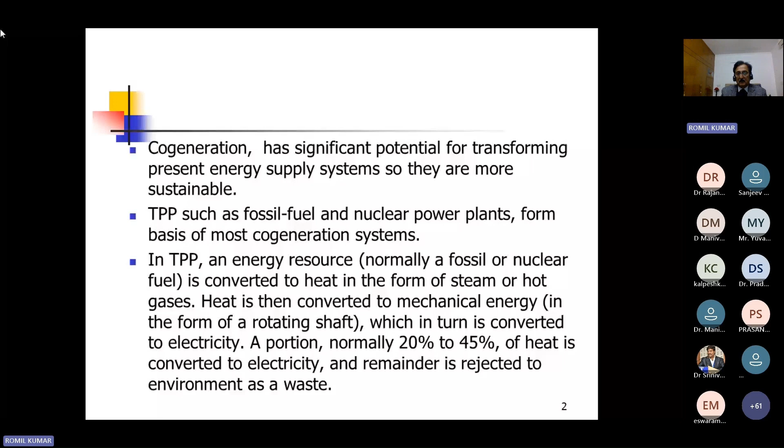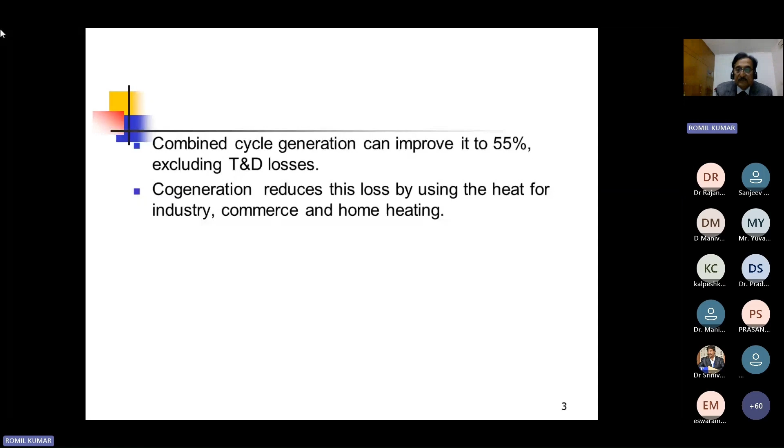Our intention is to harness this particular heat energy into some usable form, so that the efficiency of the overall plant is improved and less fuel is used to generate electricity, and at the same time heat energy, which we require for some definite purpose in the industry. By using combined cycle generation at thermal power plants, we could improve this particular efficiency from 45% to 55%, and the rest of the energy is wasted. But cogeneration reduces this loss further by utilizing the heat which was otherwise being wasted, for industry, commerce, and for heating of houses.

Basically, cogeneration of electricity, which is also called combined heat and power, is a process where both electricity and useful heat are produced from a single fuel source. This results in improved energy efficiency because we are utilizing the waste heat and reducing the wastage of energy into the environment. This ultimately leads to substantial cost savings on account of fuel, and reduced environmental impact because we are allowing less heat energy to go into the environment.

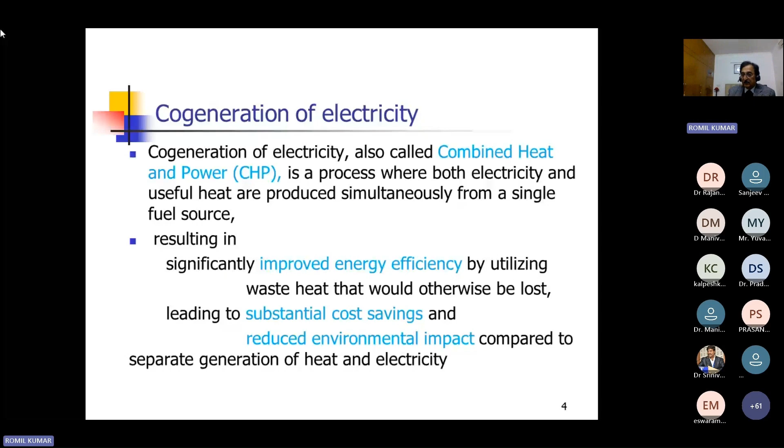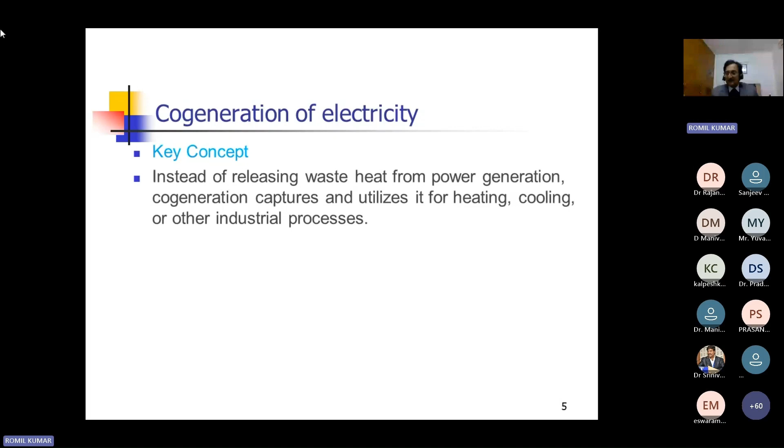The key concept for cogeneration of electricity is that instead of releasing the waste heat from power generation into the environment, we capture this heat energy and utilize it for heating, cooling, or any other industrial purposes which we can devise and provide beside the generation plant. So it is efficient power generation because the cogeneration system generates electricity while simultaneously capturing the waste heat, or utilizing the heat which otherwise was being wasted. This process significantly reduces energy waste and enhances the overall efficiency of the plant.

But for this, we have to devise methods for heat recovery and its utilization, because the captured heat is utilized for various applications. What can be the applications? Heating, cooling, or any other industrial processes which can run with the heat energy, or which can convert the heat energy into some useful energy, so that energy utilization is maximum and reliance on other heating systems is reduced.

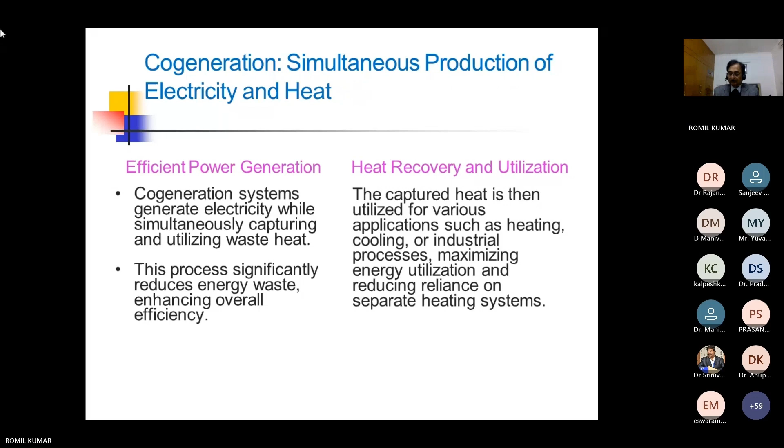Now, if we see the importance of electricity, electricity is the most important critical component of the infrastructure which affects the growth of any country. Because for the growth of any country, we need agriculture, and agriculture growth is there only when electricity is there. We need industries run with electricity, we need corporates, they run with electricity, because infrastructure is essential for sustained growth and that needs electricity.

We are generating electricity by two kinds of sources. One is coal, hydro, natural gas, oil and nuclear power. These sources or these fuels are called conventional sources.

Then there are some limitations, or we can say there are some environmental impacts of generation with the conventional sources, whether it may be coal, hydro, natural gas, oil or nuclear. So we have to shift our energy generation to non-conventional sources, which are wind, solar, agriculture and domestic waste, because the impact of generation from these non-conventional sources is less, pollution is less, and that's why we have got a shift to these non-conventional sources of energy.

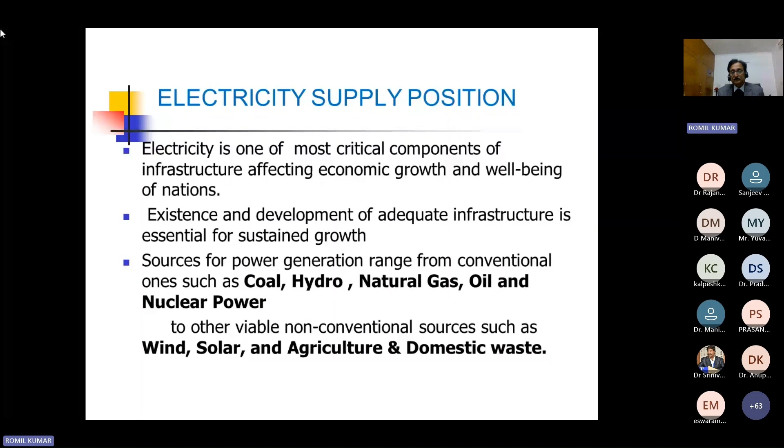Now, demand of electricity has been growing at a rapid rate, and it is increasing day by day. It is expected to grow further in the years to come. At present, India is the world's third largest producer of electricity and third largest consumer of electricity.

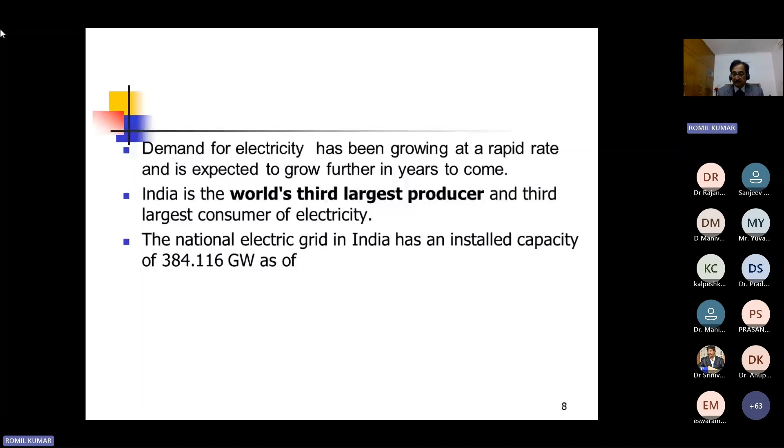The national electric grid in India has an installed capacity of 384.116 gigawatt as on 31st of December 2024, the latest figures available. And this is with the help of two types of sources categorized as renewable sources and non-renewable sources. Now, renewable sources are those which cannot be exhausted even after continuous utilization, such as sun, wind, and tidal energy. Non-renewable sources means those which are exhausted after their use, that cannot be reclaimed.

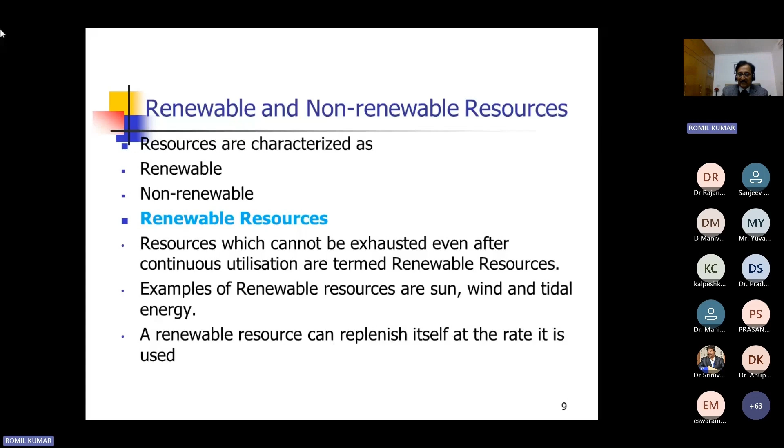Nuclear has got 8.180 gigawatt. Now, thermal and nuclear - in the production of electricity from these two power plants, a lot of heat is generated, and a lot of potential is there to harness this heat, which otherwise goes waste. And by this, we can increase the efficiency of generation of electricity at the power plant. And that is the need of the time - more energy, less fuel.

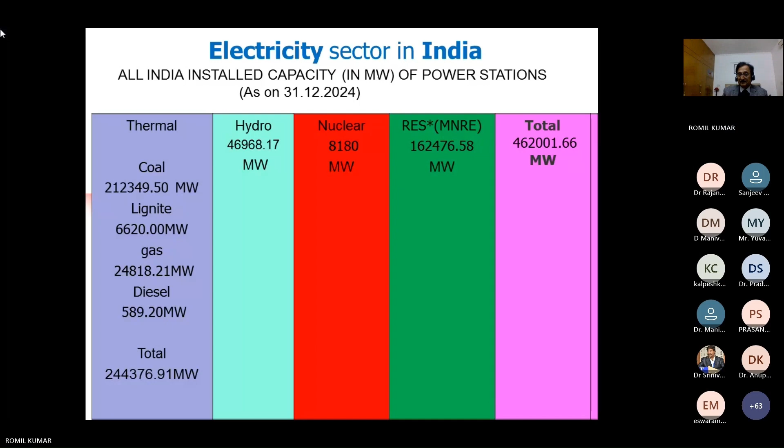As far as renewable power capacity is concerned, RES includes small hydro project less than or equal to 25 megawatt. I tell you here that hydro projects are included in both renewable and non-renewable, and they are being controlled by two different ministries. These small hydro projects are under MNRE, Ministry of New and Renewable Energy, and larger projects are controlled by the Ministry of Power. So, small hydro project of less than or equal to 25 megawatt are in the RES, then biomass power, urban and industrial waste power, solar and wind power.

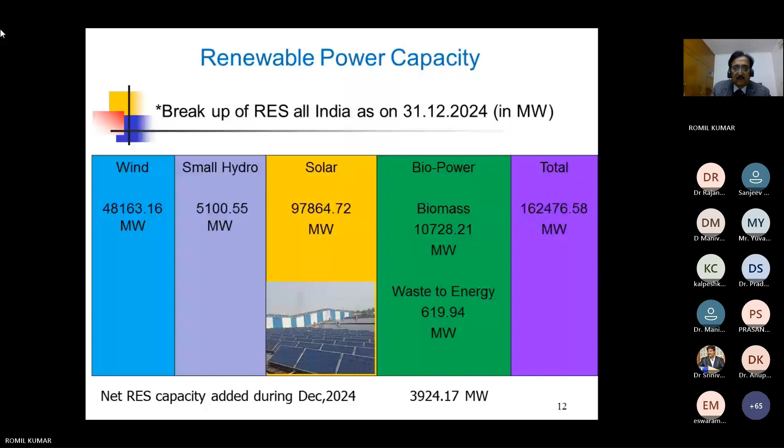Now this cogeneration system for producing electricity is the same method. We are generating electricity, but here the steam or heat energy is captured and utilized for some useful purpose. Overall generation efficiencies can reach up to 90%; normally 80 to 90% is achievable.

One more thing is that the electricity produced by the cogeneration plant is used locally, because we cannot take the heat energy away to far places. So this heat is utilized within the plant or near the plant. This means we are not required to transport or transmit our energy on transmission and distribution networks over long distances, so T&D losses are also small, because T&D losses are proportional to the square of the current flowing on the transmission lines. So because the distance is less, I square R is less.

So by this, cogeneration offers energy savings of 15 to 40%. Overall energy efficiency can be achieved - I mean, energy savings of 15 to 40% is achievable when compared to the supply of electricity and heat from conventional sources.

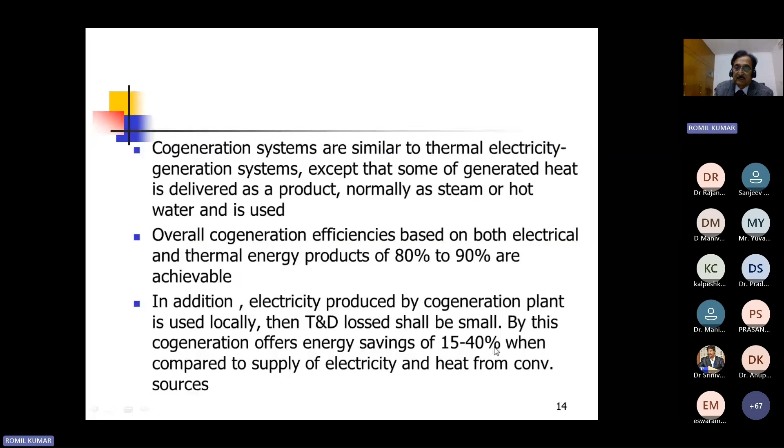Now, the cogeneration process merges the production of electricity and usable heat, which substantially reduces carbon emissions and energy costs.

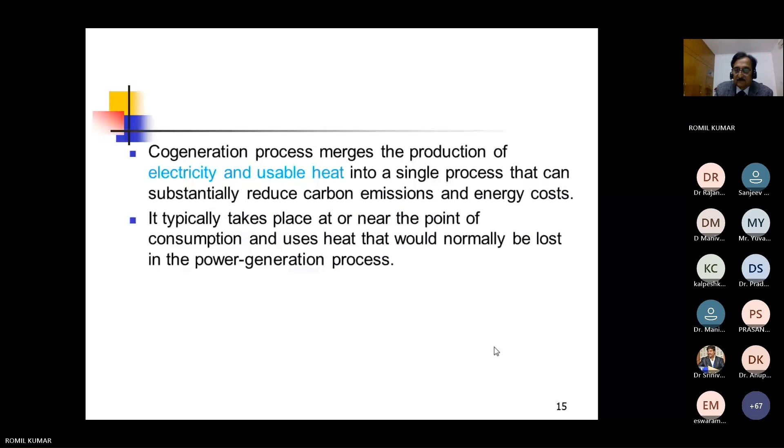The prime mover, the turbine system, such as the gas turbine or steam engine, is the heart of the cogeneration system. It drives the generator for ultimately producing electrical energy. Then the generator converts the mechanical energy from the prime mover, from the turbine, into electrical energy, which can be used on site, within the plant, or integrated with the grid.

And then the third system is the heat recovery system, because heat is also produced in this process. So heat recovery components, which are normally heat exchangers, capture and utilize the waste heat from the prime mover, producing useful thermal energy.

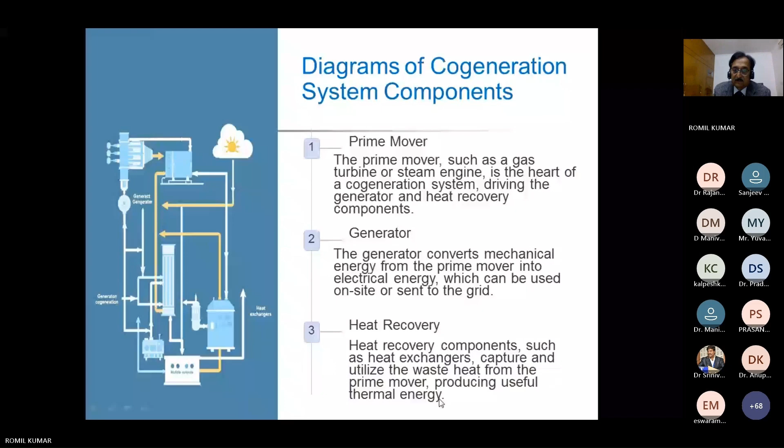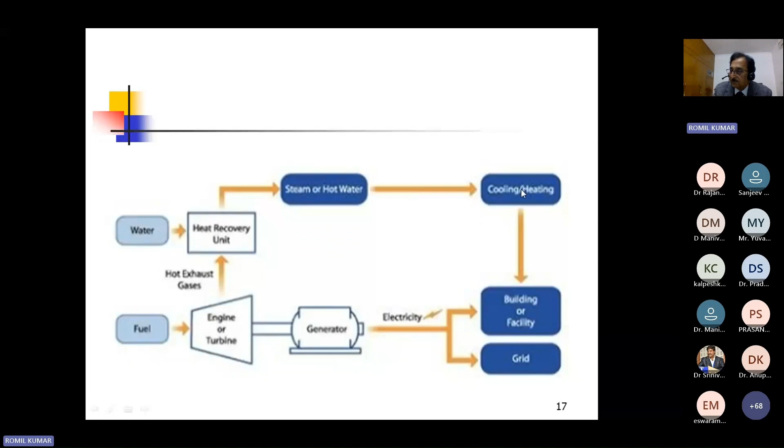In this diagram, I will show the fuel consumption: fuel is given to the engine or turbine, then the generator is connected, electricity is produced, and electricity is given to the building or facility and integrated with the grid. Then it has another system also: the hot exhaust gases go to the heat recovery unit, water is flown in there, then through heat exchangers, steam or hot water goes for other useful purposes in the buildings, factory, or facilities.

Now this was regarding the concept of cogeneration. Now we come to the advantages of cogeneration. The advantages include higher energy efficiency, lower energy costs, reduced greenhouse gas emissions, increased energy security by reducing reliance on grid supply, and potential for economic incentives due to its sustainability.

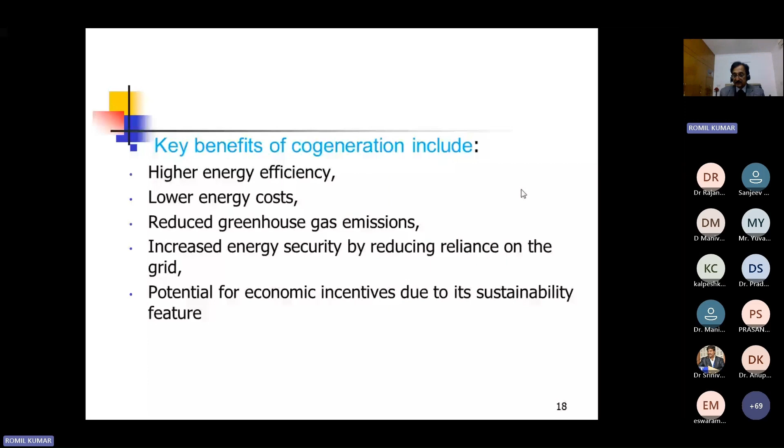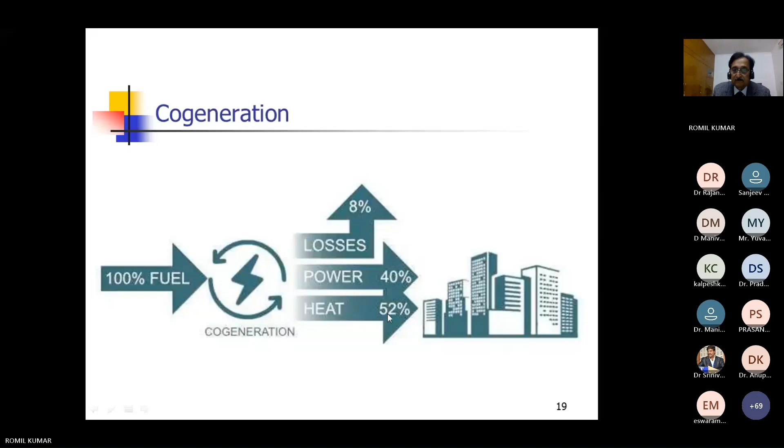Because in cogeneration, we can achieve efficiency of 90%, and 8 to 10% are waste losses. So with 100% fuel input, power output is 40% and output heat is 52%. So if we discuss the individual benefits, then first is increased fuel efficiency.

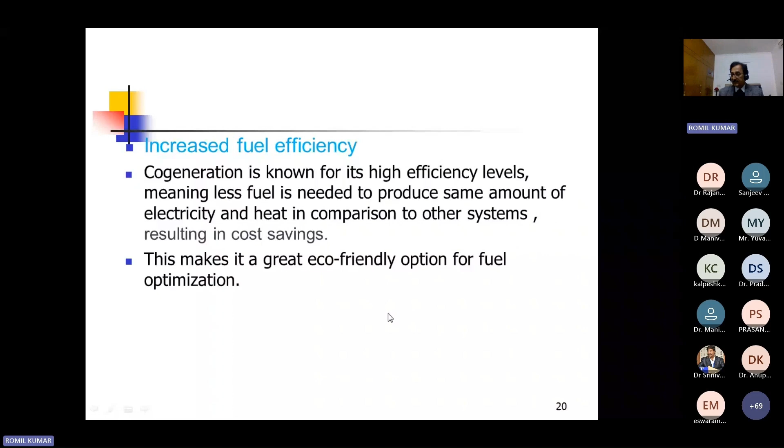Because in the cogeneration process, less fuel is required to produce the same amount of electricity and heat, which otherwise would need more fuel for producing the same amount of electricity and heat. Then increased energy efficiency, because in the cogeneration process, the waste heat is being captured and utilized. It means the wastage to the environment is less. Therefore, the energy efficiency is increased.

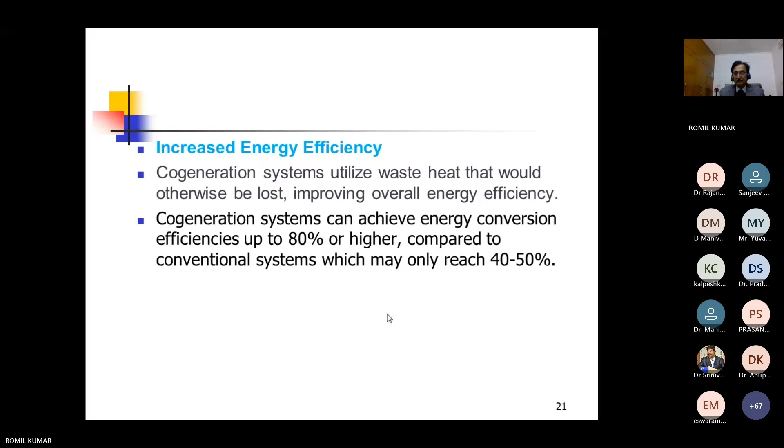We can increase the energy efficiency up to 80% to 90% compared to the conventional system, because in the normal conventional electricity generation, the energy efficiency is normally 40 to 50% at the maximum. Then we are utilizing less fuel and producing heat and electrical energy both. It means resource optimization is there.

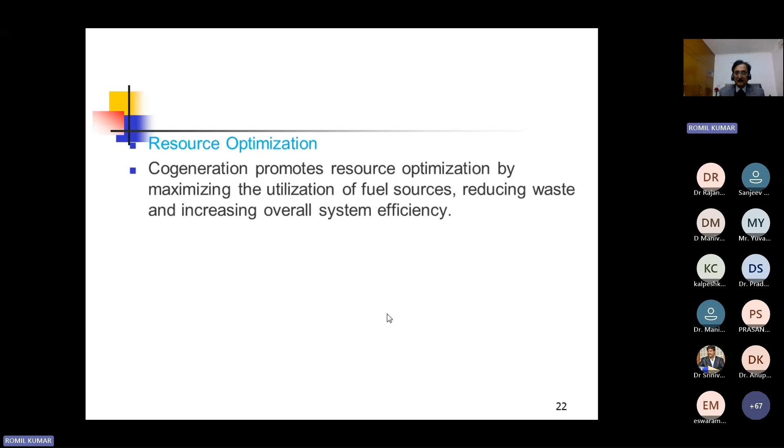Reduced energy costs, and all these benefits we have discussed here ultimately lead to the reduction of the energy costs. The cost of energy, it means the cost of electricity per unit shall reduce, because the amount invested or incurred in production of that particular unit is reduced, so the bill will also be reduced.

So lower operational cost due to the reduced fuel consumption and better heat utilization. The more efficient the system is in creating electricity and heat, the more the energy cost shall reduce. And when energy costs are reduced, the energy bills for the industry or the homeowners shall also reduce, because the efficiency has increased and energy waste has reduced.

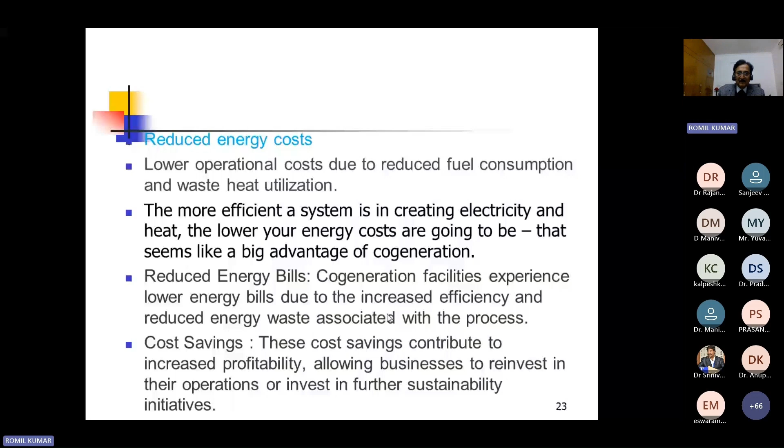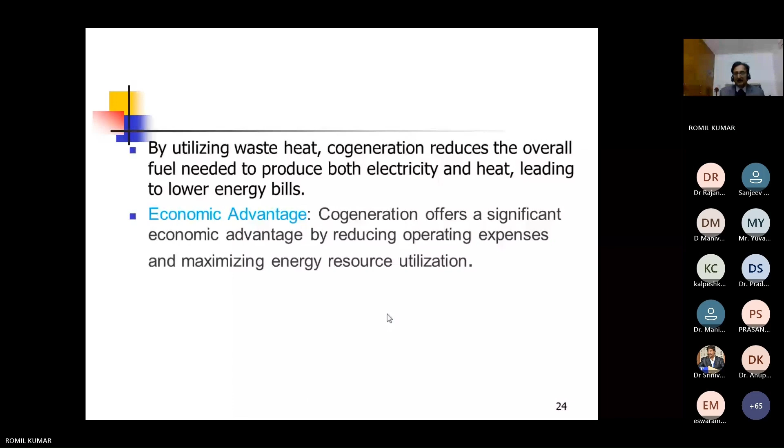And when the cost saving is there on account of energy bills or electricity bills, then the owner of the factory or the owner of the plant can allow the business to expand. That is, he can invest this particular saved money in some other operations. Then economic advantage, because all this leads to the economical advantage for the industry. Then impact to the environment.

The question arises here, what is environment? Environment is basically everything around us with which we are interacting. Everything around us with which we are interacting. And the components of environment are air, soil, water, all flora and fauna, all living beings. They are all components of environment.

And thermal power plants, including nuclear power plants, have very high impact on the environment, because the outcome of the activities at these power plants is affecting air, water, soil in the surroundings, all flora and fauna even in the environment. So we have to reduce this impact of electricity generation on the environment.

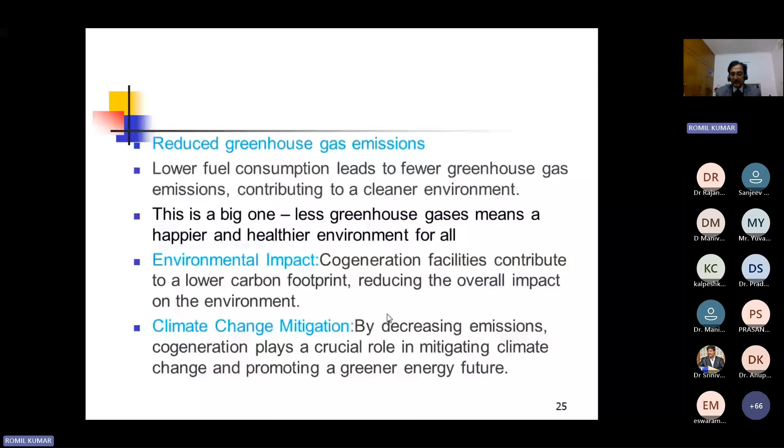Am I audible to you? My connection is okay? Anybody who can tell me? Yes, sir. Okay, good. Thank you.

Now, grid independence. Now, if every facility draws power from the grid, the load on the grid will increase. It means we will have more generation from conventional sources. And if some of the facilities use methods to produce their own energy, it may be electrical energy or heat energy or utilization of the heat energy, then the grid dependence will reduce.

And moreover, this independent production for its own facility gives a more stable or reliable power supply, because the grid can fail, the grid can have some disturbances, and then this independent supply from cogeneration will provide electricity. And this may be very important for some industries which need highly reliable power supply, because they don't want any cut during their manufacturing process, such as the glass industry, the rubber industry, the tire industry.

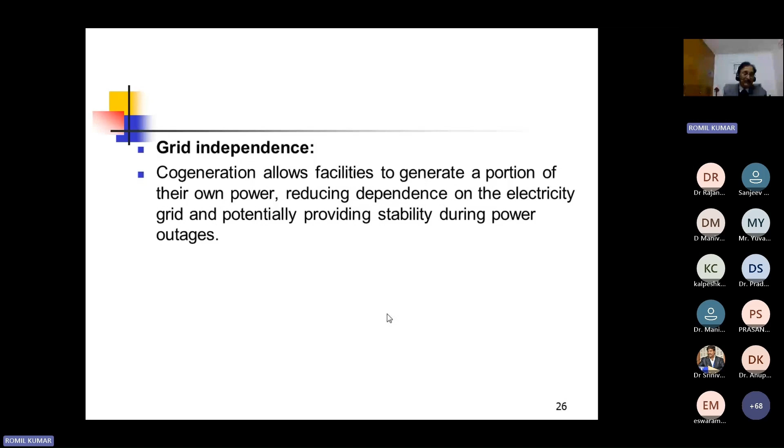Now, cogeneration's role in decarbonization and emission reduction. Now, renewable energy integration. I told you that this cogeneration can be integrated with renewable energy sources like solar and wind, providing a more resilient and sustainable energy system. Then, emission reduction goals. Cogeneration plays a crucial role in achieving the global emissions reduction targets by improving the energy efficiency and reducing the dependence on the production of electricity with the help of fossil fuels.

Then carbon neutrality is also there. By reducing the emissions and leveraging renewable energy sources, cogeneration contributes to the transition towards a carbon neutral energy future, which is the need of the time.

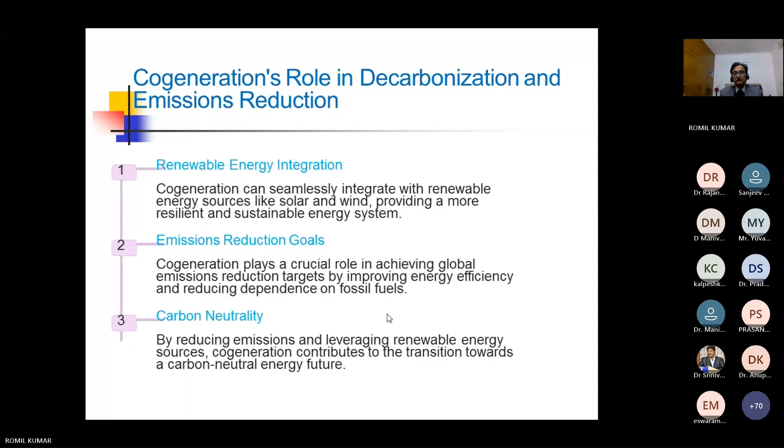Now, reliable and resilient power supply, because this cogeneration is on-site power generation. It allows businesses to generate power on-site, reducing the reliance on the traditional power grid supply and ensuring a more reliable energy supply, especially for the processes which need highly reliable supply, such as the glass industry, the rubber industry, such as the tires industry. They need continuous supply. They can't afford a power cut even for a minute.

Then backup power. In case of outage of supply, the backup can be taken from their own supply, which is the cogeneration supply. That is, in case of a grid outage, cogeneration facilities can provide a reliable backup power source, and this minimizes the disruptions to critical operations which require continuous supply without fail.

Then energy independence. Cogeneration promotes energy independence by providing a self-sufficient source of power, reducing the vulnerability to external factors, because there may be so many factors, bad weather, storms, earthquakes, by which the energy supply may fail. The distribution system may fail during a flood. So any disaster can disrupt the supply from the grid.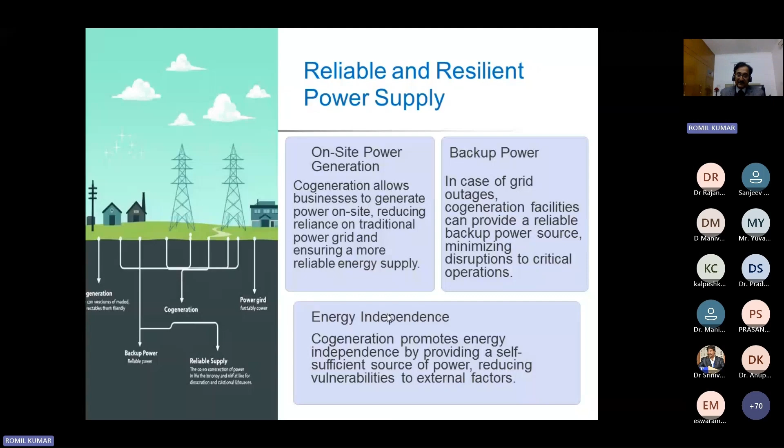Should the facility suffer due to that? To avoid the heavy losses which may occur, they need highly reliable supply. They need energy independence from the grid supply, and that is possible if they have a cogeneration facility also. Then diversification. Now, the CHP plants, that is the cogeneration plants, offer flexibility by integrating with the renewable energy sources, enhancing the energy security and sustainability.

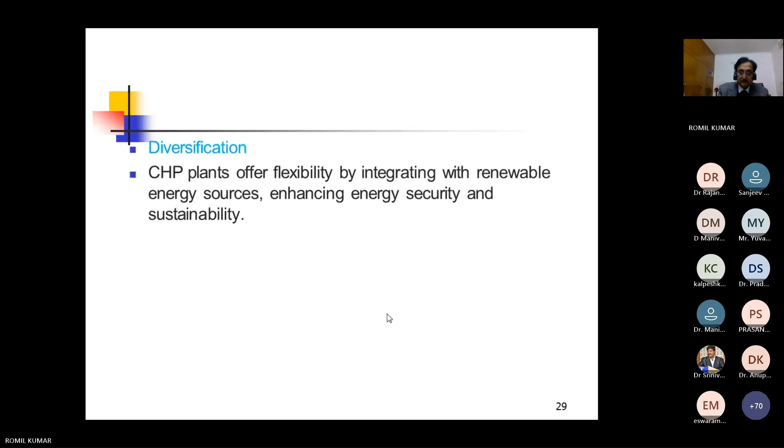Okay, now we come to another topic, which is where we can utilize or apply this cogeneration system in the industries. So first of all, we can apply this cogeneration system in several sectors. First, we will discuss where we can use this in the agriculture sector.

So heat produced during the CHP process can be used for greenhouse heating, because CHP provides sufficient and reliable heating, and greenhouse heating optimizes the crop growth and extends the growing season. By creating a temperature controlled environment, we can optimize the crop growth and extend the growing season, and that is possible with the help of the CHP.

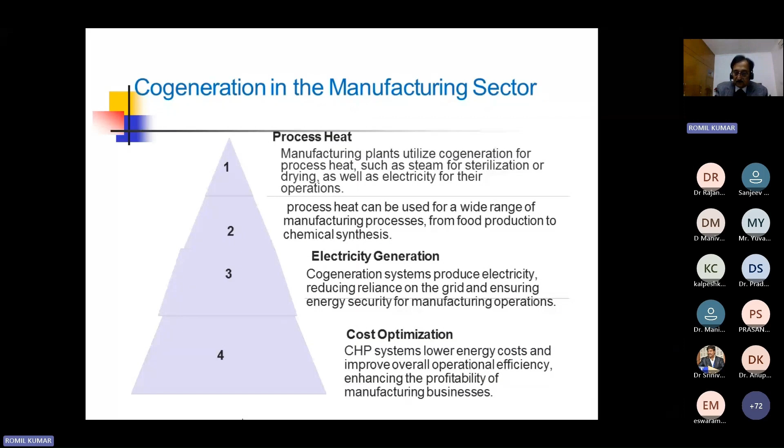Then cost optimization of the manufacturing sector. CHP systems lower the energy costs and improve the overall operational efficiency of the plant. It increases the profitability of the manufacturing processes, and ultimately the profitability of the business is increased. Now we come to another sector, that is cogeneration in the power generation sector.

It is increased efficiency. When we are using cogeneration in the power plant, we are increasing the efficiency. So cogeneration plants improve the overall efficiency of the power sector by capturing and utilizing the waste heat, which ultimately leads to reduction in the fuel consumption for production of the same amount of electricity and heat.

Then diversification. These cogeneration plants offer flexibility, because the electric energy can be integrated with the renewable energy production, enhancing the energy security and sustainability. Here I will elaborate this word energy security. Energy security means when we are producing electricity, then we want continuous production. We don't want any interruptions.

So our system is secured only when it can withstand some disturbances in the system. If there is some disturbance in the system, our system should be able to withstand that. It should not fail. So our system is secured only when it can withstand small disturbances in the system.

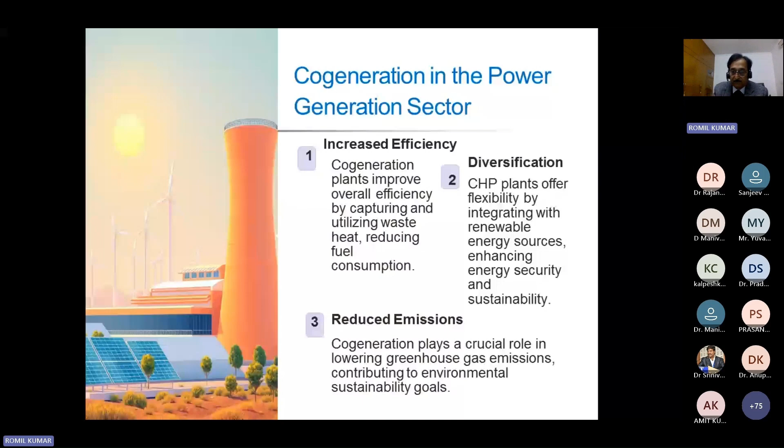Then cogeneration in the nuclear power industry. Waste heat utilization, because the nuclear power plants can use cogeneration to capture and utilize the waste heat for district heating or industrial purposes. Enhanced efficiency. Cogeneration increases the overall efficiency of the nuclear power plants by utilizing the heat produced during the electricity generation. And reduced environmental impact, because by maximizing the energy utilization and lowering the waste to the environment, we are ultimately reducing the environmental footprint of nuclear power plants.

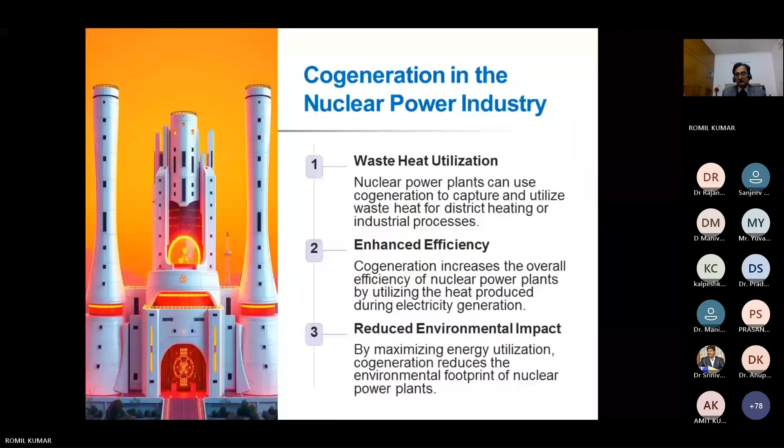In the hospitality industry, heating and cooling: we can use the heat which would otherwise have been wasted for heating and cooling purposes. In the hospitality industry, cogeneration provides reliable and cost-effective heating and cooling for hotels, resorts, and other hospitality facilities. You can use it even for hospitals if they are located nearby. Then energy savings. Cogeneration systems reduce the energy consumption and operational costs, enhancing the profitability of hospitality businesses, because we will be less dependent on the grid supply.

Then environmental sustainability. Cogeneration lowers the emissions, contributing to a more sustainable and responsible hospitality industry. It means we are reducing the environmental impact of the hospitality industry also.

Then for healthcare, hospitals rely on cogeneration to provide reliable power for medical equipment and heat for sterilization, heating, and hot water. Because in the hospital, sterilization is a very important activity. A temperature-controlled environment by heating is a requirement of the hospital, and hot water is also a requirement of the hospital. So all these facilities can be provided through cogeneration in the hospitals.

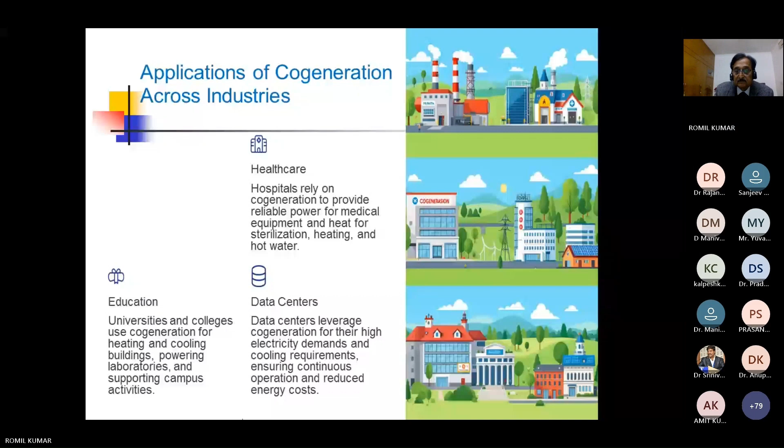So these were the applications in different sectors. Now we come to the emerging trends in cogeneration technologies. First is digitization. Advanced digital technologies like artificial intelligence and machine learning are transforming cogeneration, optimizing the operations and enhancing the efficiency. Integration. Cogeneration is increasingly integrated with RE sources, creating a more sustainable and resilient energy system. And then decentralization. Small scale cogeneration systems are becoming more common, enabling decentralized energy production and reducing the reliance on the central grids.

These types of systems are no doubt integrated and connected with the grid, but they are connected with the grid through a net meter. They are generating their own supply, utilizing their own supply. In case of any problem in their own supply, that is the cogeneration system, they can draw power from the grid.

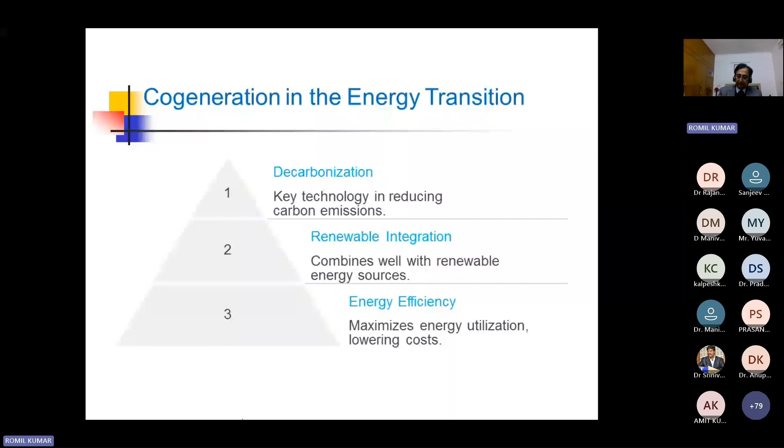Now, what is the future? Cogeneration's role in the future of the energy sector. Sustainability. Because we want to improve the sustainability of the system. This cogeneration is having a critical role in reducing the emissions, flue gas emissions, etc., and improving the energy efficiency, by which the sustainability of the energy sector will improve.

Then innovation, ongoing research and development will contribute to improve efficiency, because this is one of the methods by which we can increase the efficiency, but this will give a way or the path for the researchers to develop other methods to improve efficiency, and no doubt it will lead to economic growth, because it will create good jobs and supports economic development through energy savings.

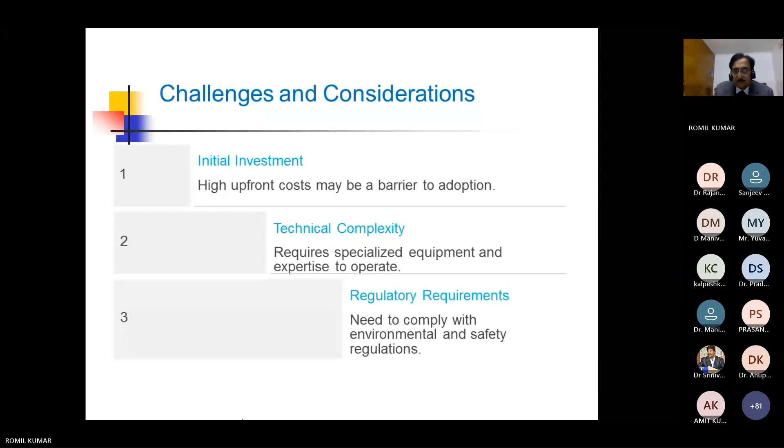Then there are some limitations of this cogeneration system, because when we devise a system, it cannot be 100% perfect. There are some cons that must be considered when looking at cogeneration. What are those? Not an intrinsic energy source, because cogeneration is just used to make other energy sources more efficient; it is not an intrinsic energy source by itself. Then not suitable for everyone. Cogeneration is only applicable to the areas that have a need for heating or cooling and electricity.

It can be costly. Although cogeneration can save you money on your energy bills, the installation cost for some systems can be very high. Then not always environmentally friendly, because some pollution or some impact is there on the environment even if we are using cogeneration.